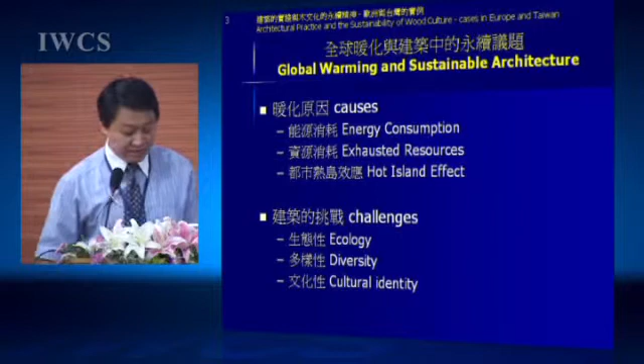A lot of presenters have said that of all the ethnic groups in the world, they all have wood culture. In the morning, we heard the presentation from Japan, and also the culture in China—they also have the culture of wood and wood buildings. Now they have lost it; the wood culture has disappeared gradually. That's the problem.

If you have the chance to travel to Europe, there are a lot of ancient wood buildings remaining there, as you can see in the photos on the left. This is a building combining wood and concrete, about 4 to 5 stories, in the city or countryside, especially in western and central Europe. There are a lot of old villages consisting only of wood structures. The whole village has been maintained and protected, so we can see there's a strong tradition in terms of wood culture in Europe. Let's look at the photo on the right.

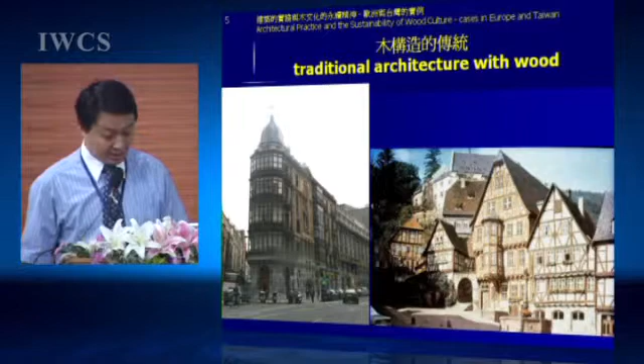This photo is of the Alps Mountains in Switzerland. It's a typical multi-level farmer's house, only 200 years old. Why I say it's young is because if you have the chance to go to Europe, it's very easy to find yourself living in a building of 200 or 300 years. Why were they using wood to build the structure? First, materials were around, and second, wood is very important—it's very good at insulating heat, and the place is very cold, so wood is very good to keep warm.

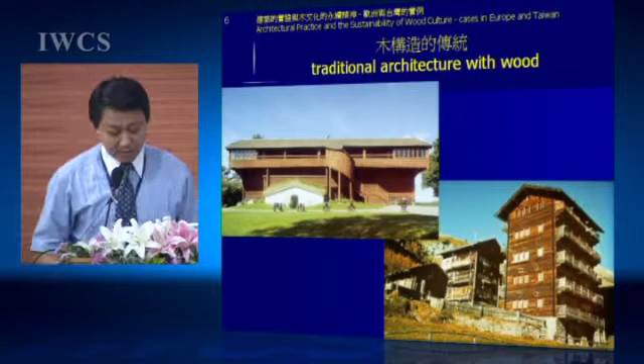The next project on the left is in Sweden. It looks like a very modern structure, but our investigation shows it is a building from the 15th century, about 400 or 500 years ago. The builder is unclear—it's only a village cottage. It also uses a lot of wood, a very high percentage. North Europe is a place with abundant forest resources. This is a church left from the 16th century.

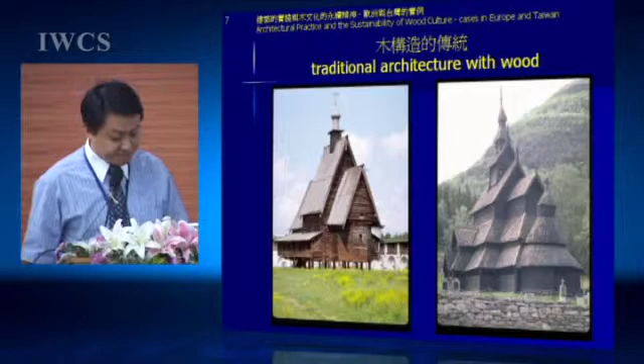UNESCO has also awarded protection grants to these churches. These are very old buildings.

From the perspective of modern wood structures in Europe, we can draw conclusions on the following points. First is the large size. Because of the development of modern technology, we are able to build large size buildings with large spans using wood.

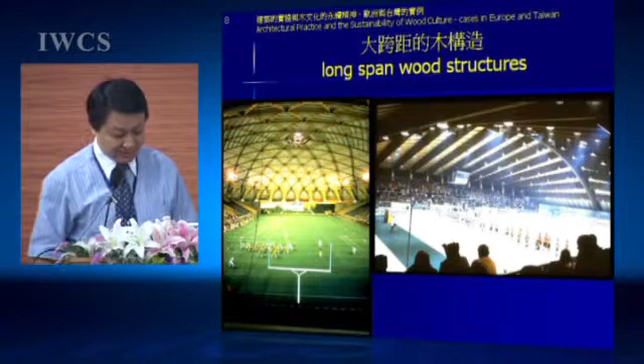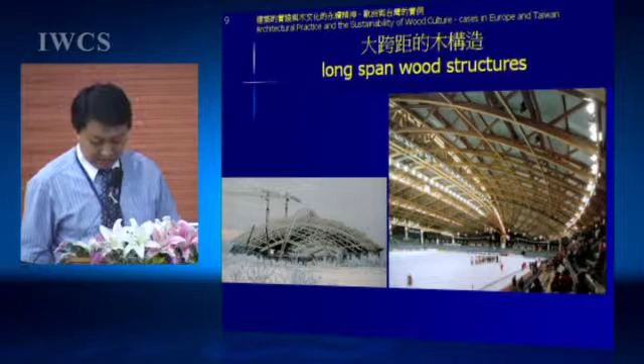This is an indoor sports venue in Germany. Let's look at the photo on the left. It's not from Europe, it's from the United States. It was built about 20 years ago. It's a very famous building. That's the long span wood structure used in the Olympics. There are a lot of Olympic stadiums built using wood.

We can see that with the development of technology, engineers and architects can use modern technology and modern methods to build modern architecture. That's a very big breakthrough in recent times.

Another thing is high capacity structures using laminated wood, especially for very big spans. Let's look at the left photo. This is in the southwest part of Switzerland. In winter there's very huge rainfall and snowfall in Switzerland.

The left photo is from France. In the center of France is an indoor swimming pool.

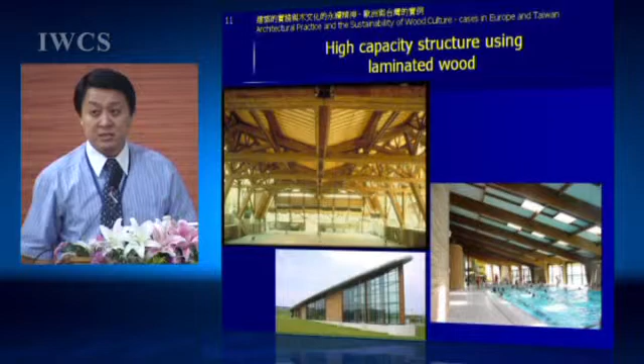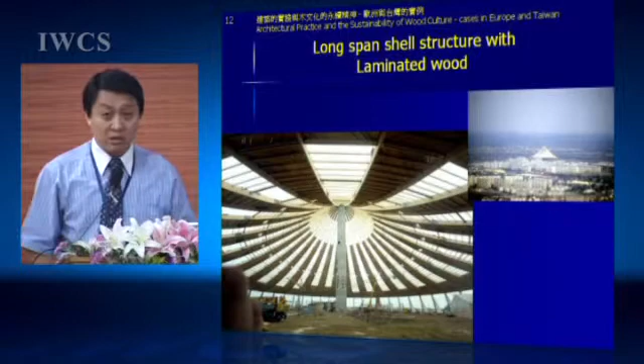In Europe, a lot of wood structure has been used to replace concrete because it is more humane, more comfortable for people. This is a very famous structure from the 1980s in Vienna. It's a long span shell structure with a span of over 100 meters.

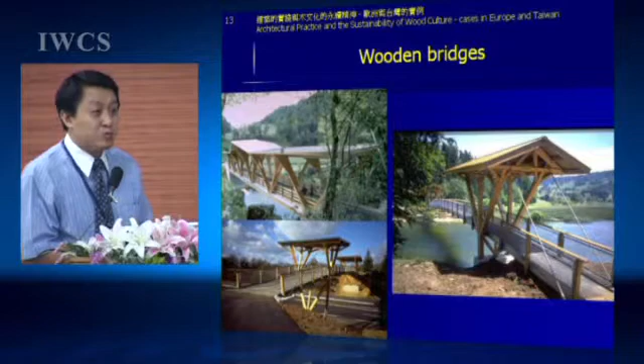These structures have one similarity, which can be seen in a lot of European bridges: they need to have a roof over the bridge. That is one similarity of nearly all wooden bridges in Europe. They want to have a roof because they want to protect the wood bridge underneath; otherwise the durability of the wood bridge will be damaged. So architects and designers believe that if there's a roof, the lifespan of the wood bridge will be prolonged.

This is a long span structure using wood trusses, with a triangle shape in the right front upright. People doing sports there can have a very comfortable feeling. Look at the left one.

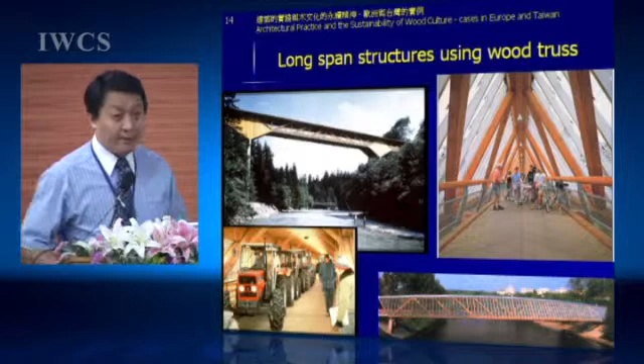This is a very long span wooden bridge, built using plywood. When the bridge started to be used, they had farmers drive their agricultural vehicles along it to give people more confidence in the bridge.

In terms of engineering, about 15 years ago in Lausanne, Switzerland, we did a lot of work on hybrid systems. The first system is the combination of wood and concrete. This concept is very simple.

In reinforced concrete structures, at the bottom they use a lot of steel. Like the professor said, to make steel we need to use a lot of energy. So we replace the steel with wood.

We just put in the nails to fix the wood onto the concrete. Let's look at this profile. If we replace the iron with wood, we can reduce a lot of carbon dioxide emissions.

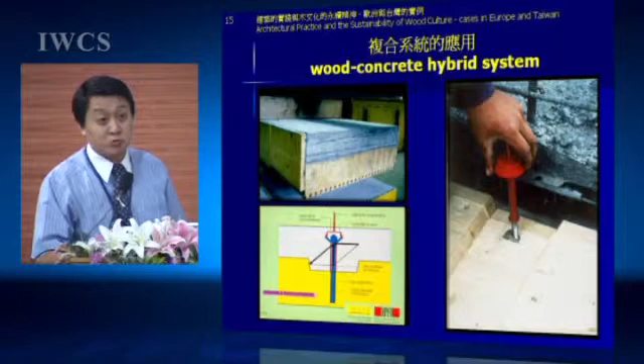And if we use this technology, 40 to 50% of the weight can be saved. That's a very special combined material.

The same technology has been applied in many other fields. We use the log because the log is very good - we don't need to process it much, so a lot of energy can be saved. The log can also be very useful to support heavy weight.

There's another hybrid system, look at the picture - it's 3 to 4 tiers of buildings. In Europe there is a lot of work using this technology, maybe 20 buildings using this technology.

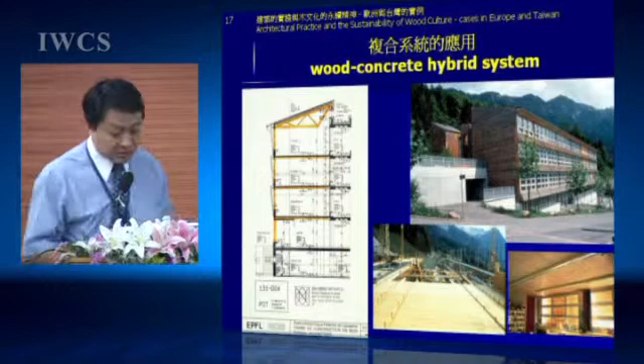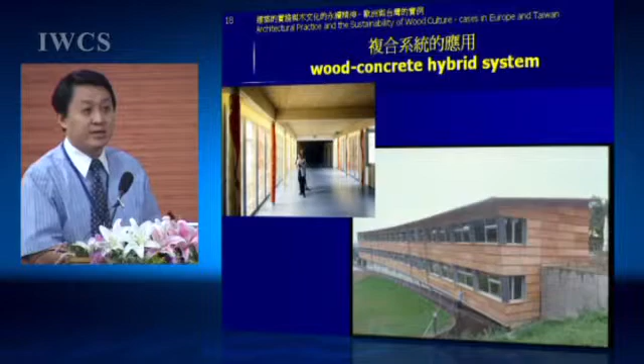This is another school building. Now in Europe there's a trend saying that in schools and hospitals, wood structure is very popular, and the government also gives subsidies for school and hospital buildings. If you want to build a wood structure, that means it's very good for human health and the environment, and the government will subsidize this practice.

This is another combined structure. This may be the largest scale, 9 buildings in Switzerland.

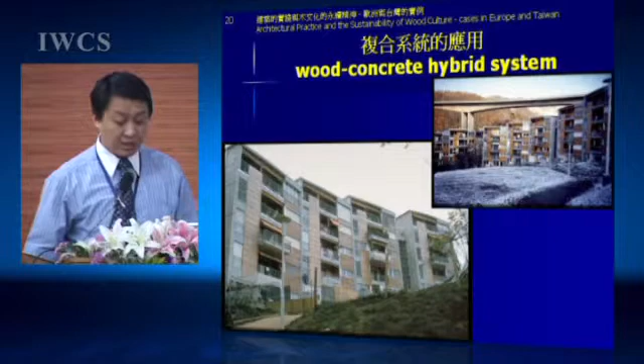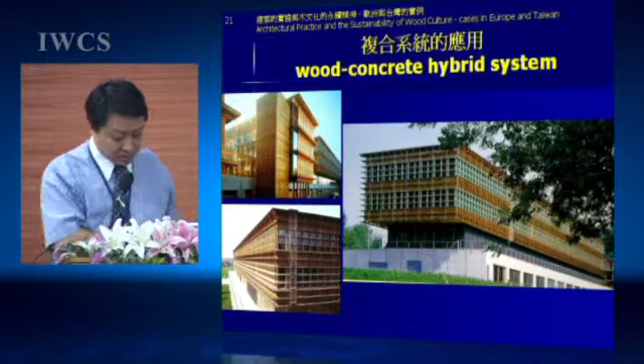It's a 5-story building, all made of wood. This is a school building. You can see that at the basis, where there is a high demand on firefighting, we will use the traditional RC. The second, third, and fourth floors, if they are classrooms or student entertainment spaces or laboratories, we use only wood.

Okay, another hybrid system. We use wood and glass and combine them together. In building, glass is only something for decoration, but in modern steel structure, they develop the glass and use glass as a kind of building material. And then we combine the glass with the wood.

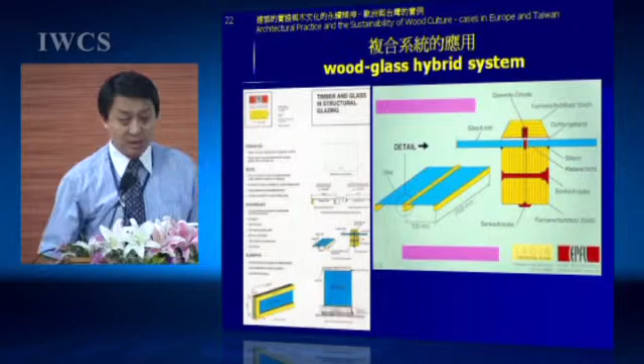Here we use a wood frame and have a plywood, and then as a result we have a wood glass beam. After the test, we see that it is very powerful and stressful. It is very easy for extension.

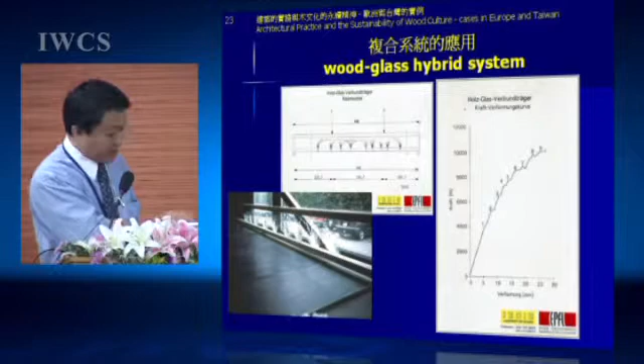That's a very good technology, a very new know-how, and we have used this technology to build a lot of new products. So you can see from this building, the glass is not for decoration. It's only a part of the structure as a beam. There's a lot of such cases in Europe.

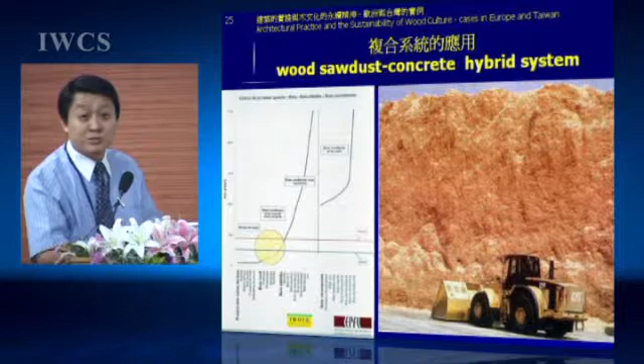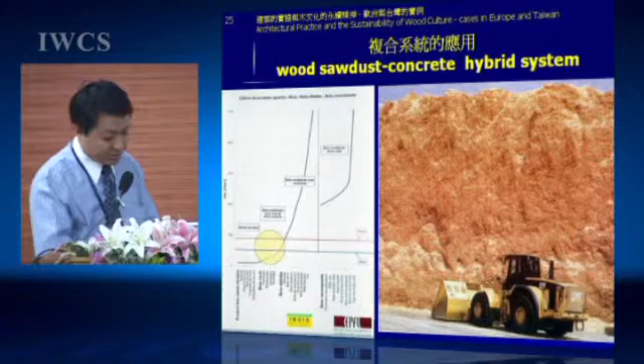Okay, the third hybrid is the wood sawdust. The more you process the wood, the more expensive the wood will be, because the more you process the wood, the lower its competitiveness against other materials. For example, if we can use wood sawdust as the raw material, we can use the sawdust as the material of concrete. You know, the sand and the stone are not renewable.

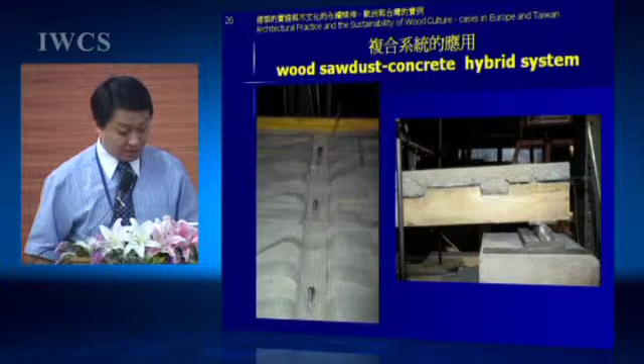And lately in Taiwan, there's a supply demand gap in sand and stone. Usually we import from mainland China, but now China has somehow banned export. So we lack the sand and the stones. If we use the sawdust to replace the sand and stone to make concrete, that will be very good, and the price will be lowered.

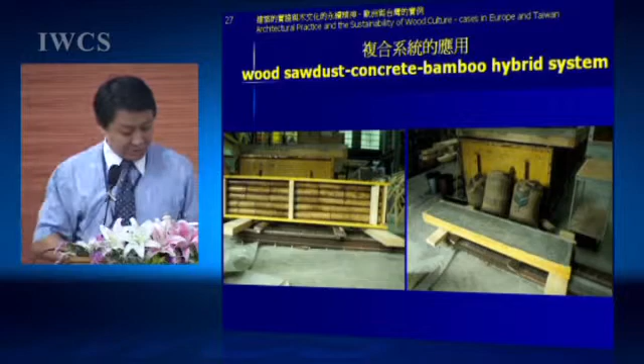We also have the wood sawdust-concrete-bamboo hybrid system. In Europe, we have something very special - you know, in Europe we do not have bamboo, but in Taiwan and in southwest mainland China, there are very big resources of bamboo. So that is a structure of bamboo and wood.

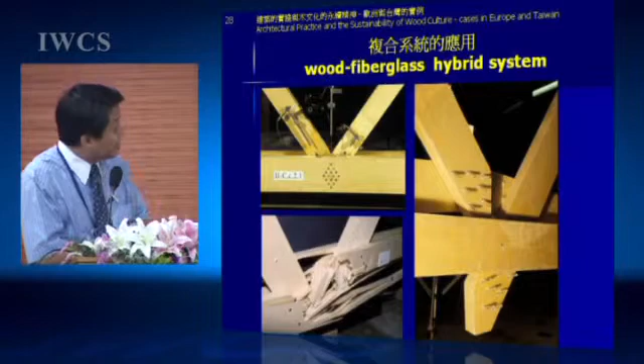The last one is the fiberglass and the wood, the combination of wood and fiberglass. You can see that this wall usually... the fiber of the wood is the most complicated problem. If we can have the wood and the fiberglass combined together, we can have very strong strength and a very powerful structure, and then they will be more safe to use this product.

This is a case of wood fiberglass. We have been using this technology to build a lot of bridges in Switzerland. We have hidden the fiberglass in it because they are not very good at withstanding sunshine. So this product is very good.

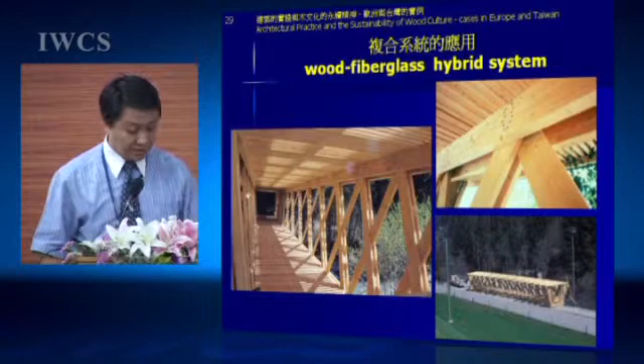That's the fourth use. The fifth use is still under progress. I don't know whether there's the same study in mainland China. It is the ultrasonic wood welding technology. We do not use polywood here - we will have the friction of the wood, what we call welding wood.

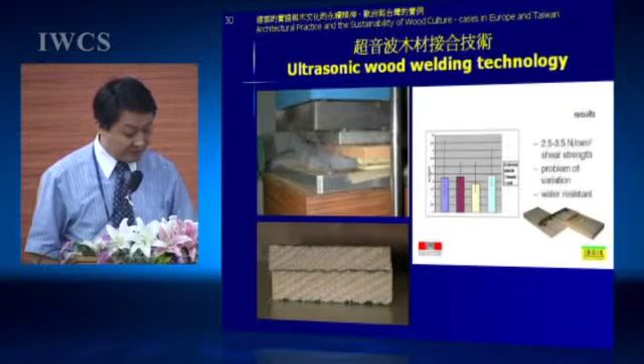You know, we can weld irons. Now we are trying to weld wood. We take the two pieces of wood, get friction between them, and then have the fibers of the two woods get together. Now our testing shows that after the friction, maybe 90% bonding will be attained without any polywood. That's a very good direction.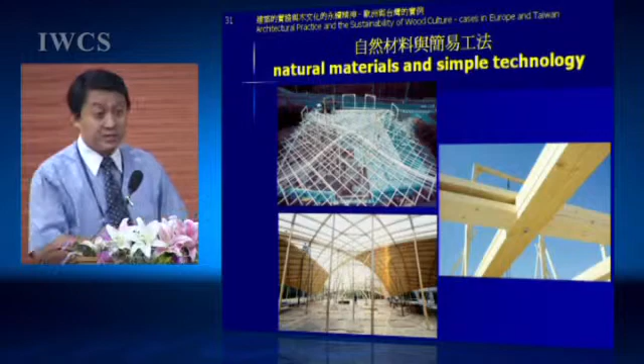Okay, about Europe, I want to talk some about natural materials and simple technology. Now, we are not talking about plywood beams because that needs big investment and input and is much more expensive. For example, this workshop...

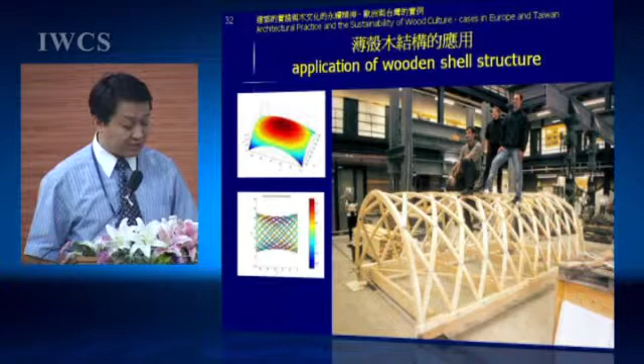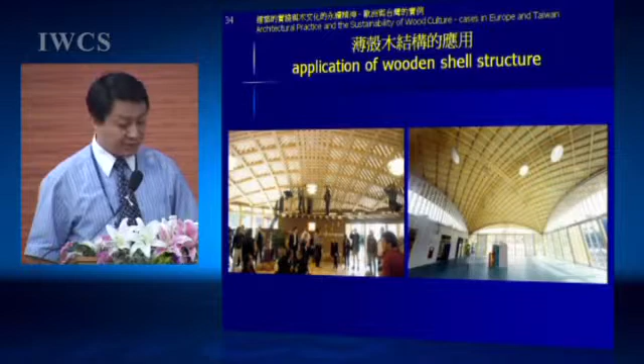We have done some work - we have done a lot of computer simulation, very good properties proved. So it's at a width of 20 to 25 meters, or as wide as 40, and the same craftsmanship is used. The processing technology is used, and only board is used.

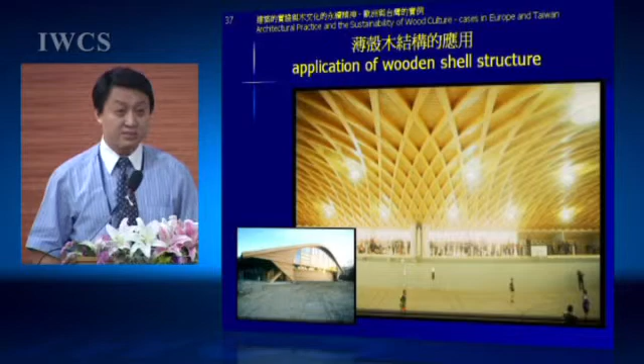This is another example in France, and very simple processing technology is used. This has the largest width, over 80 meters. And the cost per unit is quite limited, it's quite low, and log is widely used for a long time, and the cost of log is much lower than some of the processed materials.

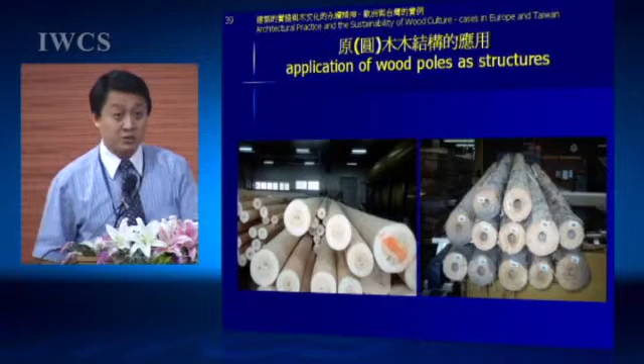Our suggestion is that we directly use log, but there are two questions. One is the drying technique, and the other is that after drying, there might be some damage to the original property of the wood of the log. Currently, generally speaking, the current processing technology is to do drilling at the core, single core drilling.

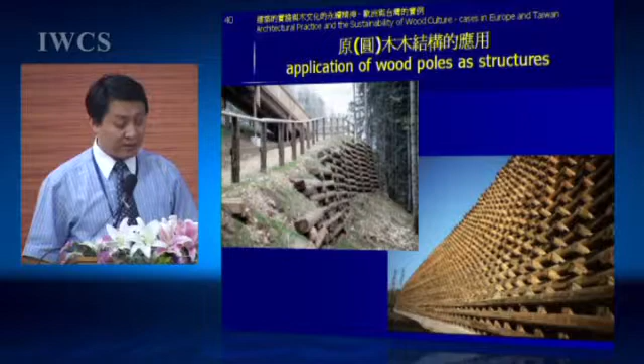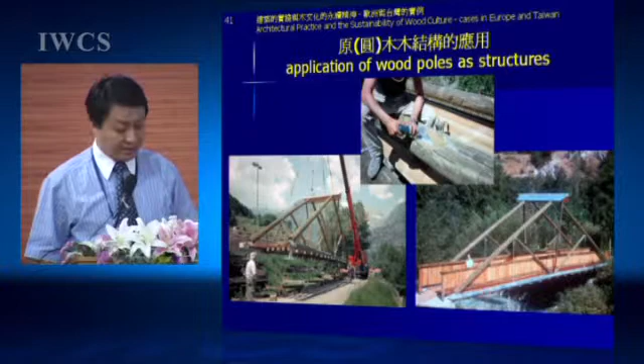Professor Wang has pointed out that in Europe there are practices where log is directly used as the final material for the structure. This is a picture taken in the rural areas of Switzerland, where log is directly made into a bridge.

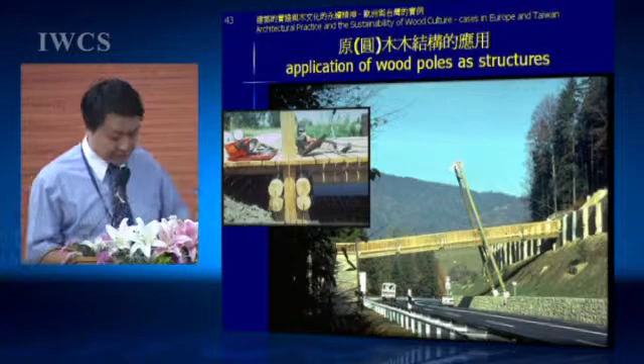Local government can't afford the bill for this highway which links Switzerland to the border of France - a wooden bridge, because the local government ran out of money. The story goes that the designer asked the local government, 'What is your budget?' And the answer was, 'We don't have any budget, we only have wood.' That's where this wooden bridge came from, born 10 years ago.

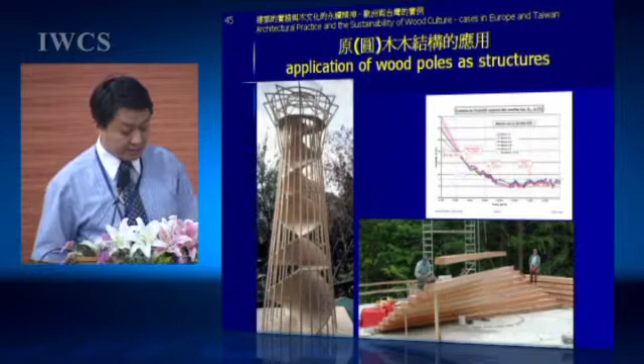I'll be briefer. These are recent works in the French-speaking area of Switzerland, over 40 meters high. Log and board are used, and this is a watching tower - a completely new project.

This work was exhibited 10 years ago in Switzerland, and the requirement was that in the future every component can be taken apart, and the recovery rate must be calculated. After the exhibition was over, 90% of the material used was sold to Rome. So economically, it's very ideal. Actually, the processing technology for log is rather mature.

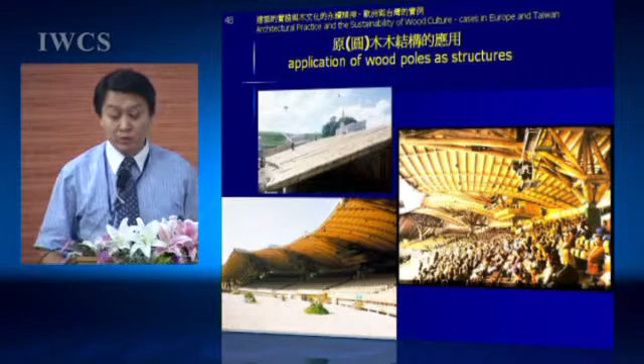Now this is also a public area being built with log in Deutschland. The standing structure and the ceiling structure are made of log.

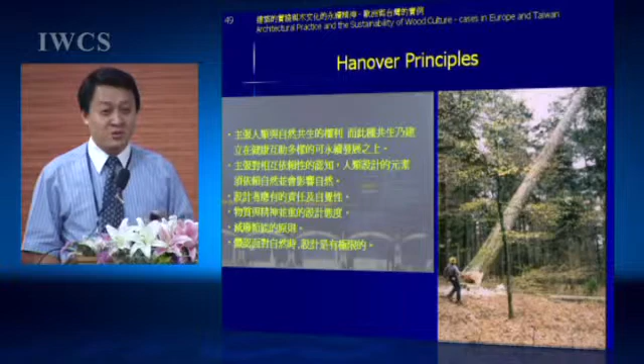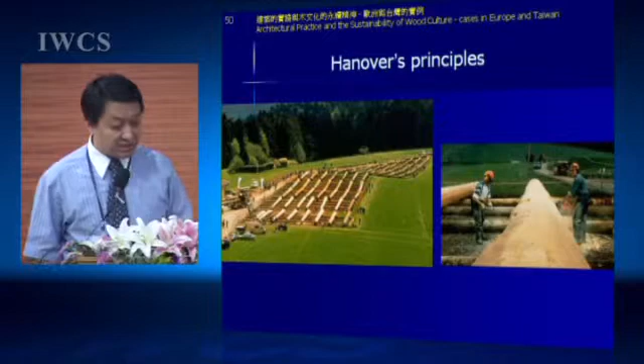In 2000, there was a very big World Expo in Hanover, and the designers of the expo station put forward several principles. If you read through these principles, you find no single word mentioning that wood must be used, but actually 90% of the structure was using wood, which has catered to today's bio requirements and was really a pioneering structure.

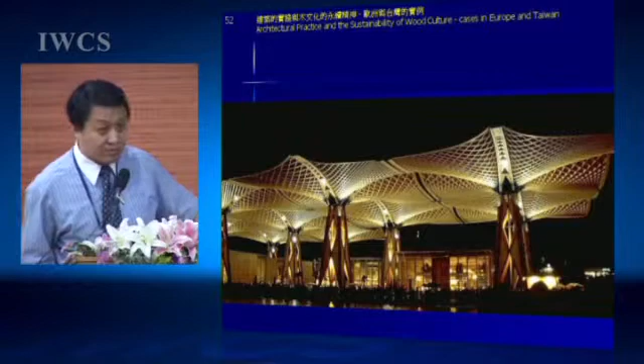And this is a well-known big umbrella structure in Hanover. This is the central part.

I have spent a lot of time doing case studies, and please allow me to do a little advertisement.

This is a master program at the University of Vienna. This program has started, however the enrollment rate is very low this year because whenever students think that only German is used as the teaching language, many students are reluctant to come. But this is a very good course.

It talks about urban wood structure, and anyone majoring in wood structural civil engineering can participate. It's a multidisciplinary program, and it is also a multinational program. It will have rotatory courses in 3 countries.

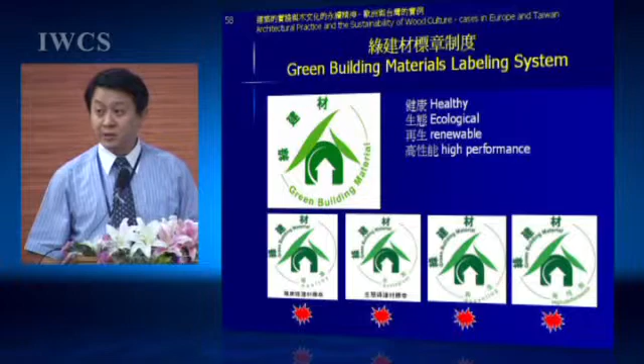About 2 years ago, we started a study on green building material with 4 directions: healthy, ecological, renewable, and high performance. In these requirements, if it's an imported product, we need FSC and PEFC certification.

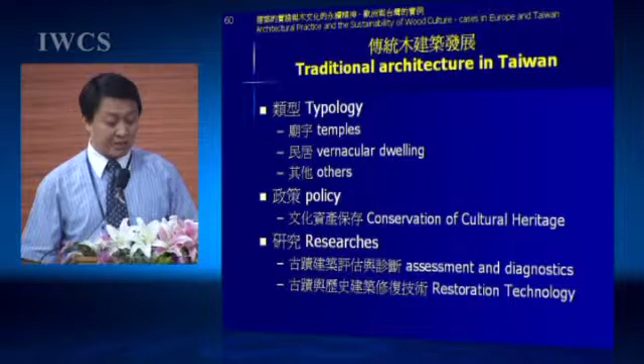About the future trend, I think first we have several classes like temple and residential areas where wood is used. For example, this is a building that was built in the Qing dynasty during Qianlong Emperor's reign.

This structure is being renovated now, and the major problem for the maintenance and renovation of ancient buildings is the inadequacy of high-quality wood. For example, the material used in that old ancient building cannot be found today.

And this is a Daoism structure in the middle part of Taiwan, about 220 years old.

Another headache is that we don't have enough investment in material science.

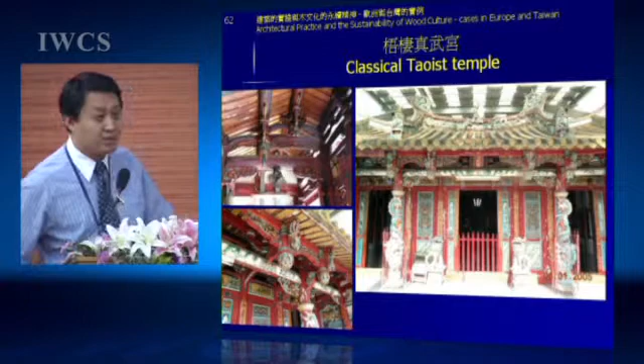For example, in China, the most difficult temples to renovate and maintain are those made of wood, because there are so many carvings, paintings, and handwriting on the wood. So it's not a single problem of making the wood strong enough to support the structure - more importantly, you must protect those precious carvings and markings left on the wood.

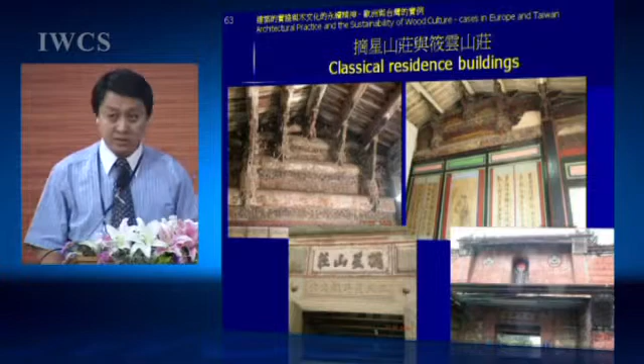On the left, it is in the middle, it is a village. And the owner of this village or this structure is well known for his efforts in cracking down on the Taiping Tianguo gangsters.

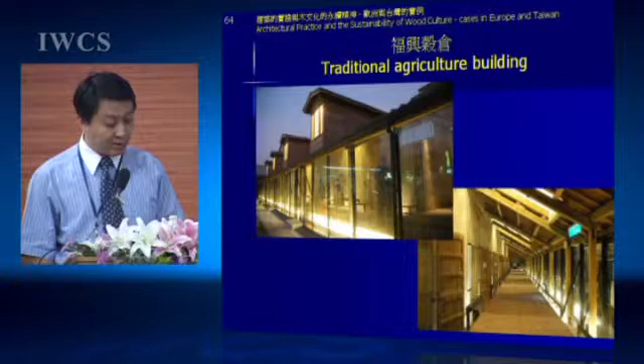This is also found in Zhanghua, mid part of Taiwan, an ancient city. We have renovated the area.

And this is in the Donggang port of Taiwan, from when the Japanese were occupying the island. It's about 30 meters wide, but we cannot retrieve the exact time when this was built.

Actually, the designer later went to Japan to ask when this structure was built. However, the Japanese answer was that it was built during the war era, so it was military confidential. So nobody knows when this area was first built. Now it is not opened to the public, but we are preparing to do that.

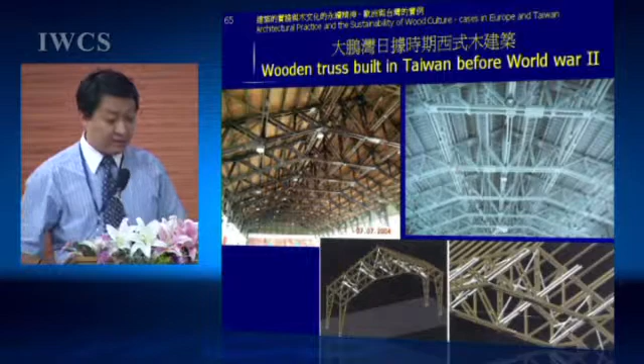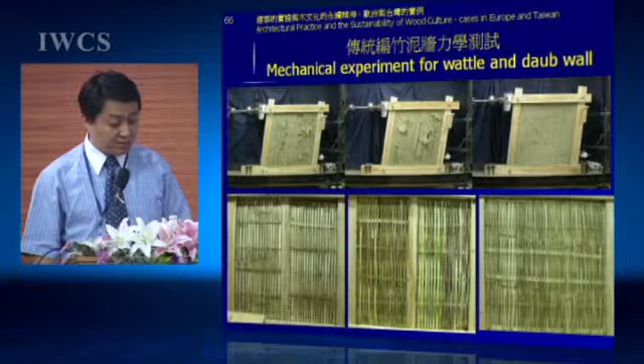We have been doing some study on the possible renovation of these ancient buildings. We have also done some experiments, conventional methods to do these experiments. For the current wood structure, it is fair to say that Taiwan is only fledgling in building its wood structure.

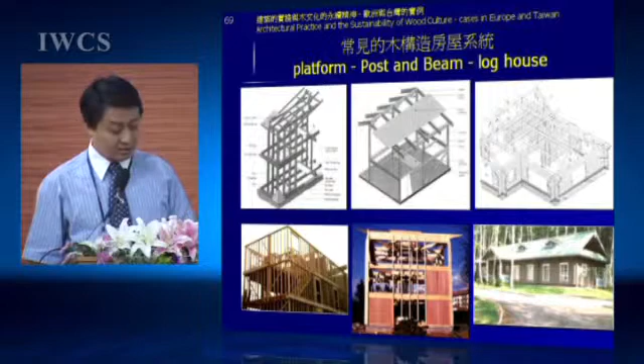The log system is one of the three most popular types of structures, most widely used in small residential houses. In 1999, after the September 21st earthquake, many houses collapsed. In some remote, mountainous areas struck by the earthquake, people began to use biomaterials.

This is a case where they built an elementary school using wood. This is another, using logs to build a bank. I think Mr. Wang is more familiar with this project.

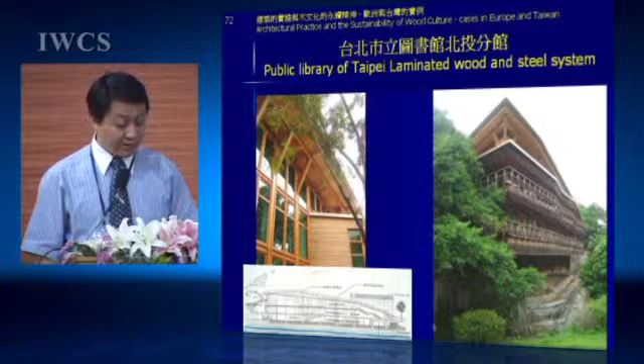This is Taipei City Library, a building built with both wood and steel. This is in Nantou—a museum of forest industry built with a laminated wood and steel system.

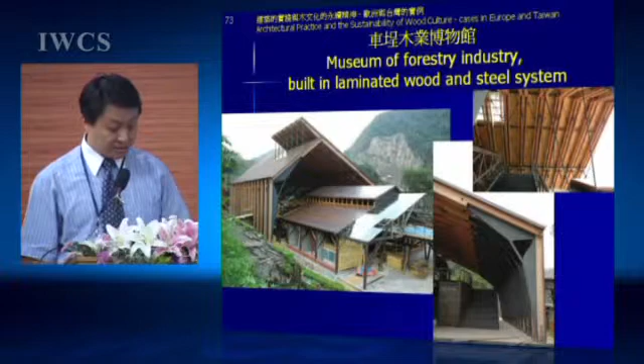We built a new building to protect the old structures under it. The design was a cooperation between Taiwan and Japan.

In the end, I want to talk about how we promote wood structure in Taiwan, how to enhance people's awareness. I have the following ideas: first, we want to have a development center; second, we want to have this promoted in schools.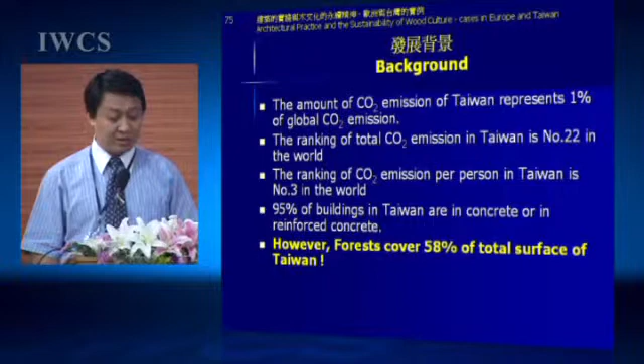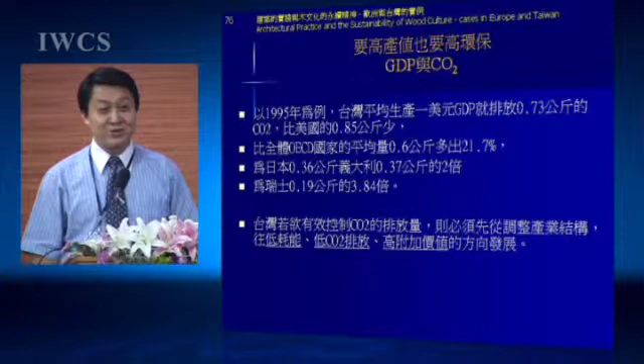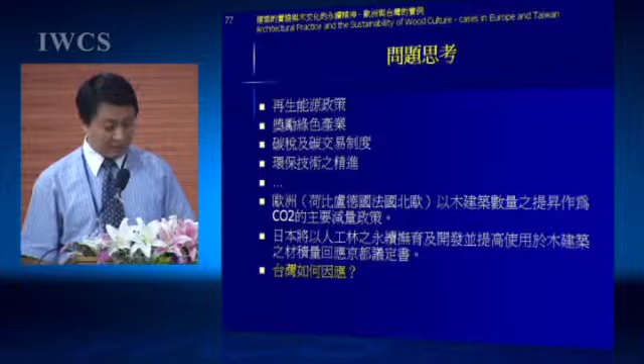Taiwan's carbon dioxide emission ranks 22nd in the world—1% of global carbon dioxide is from Taiwan, but Taiwan's forest coverage is 58%. With such a high rate, people still don't feel it. So first, the government should talk about it and make policies, like other countries discussing carbon storage trade, and whether Taiwan should learn from Europe and Japan to expand sustainable forests to increase carbon storage.

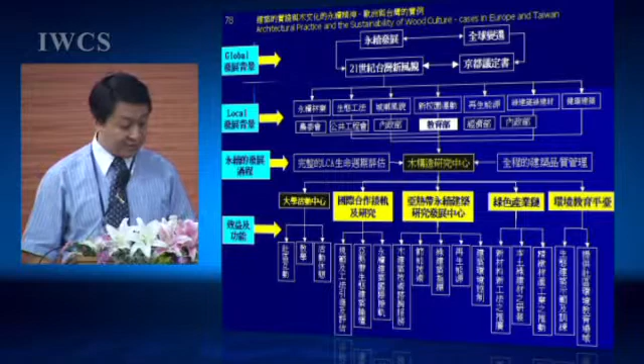That's a very good idea. So we established a wood structure research center in Kaohsiung University to bring together different ideas for a comprehensive consideration of sustainable forests, renewable architecture, and other technology.

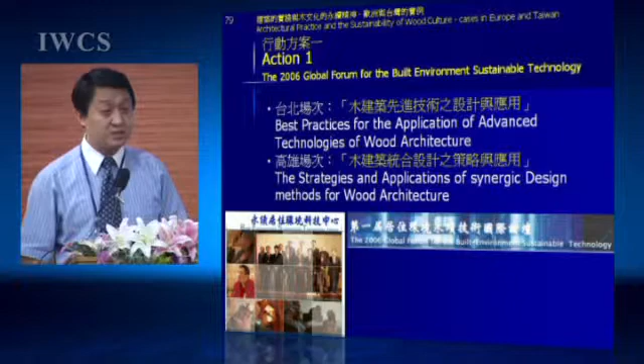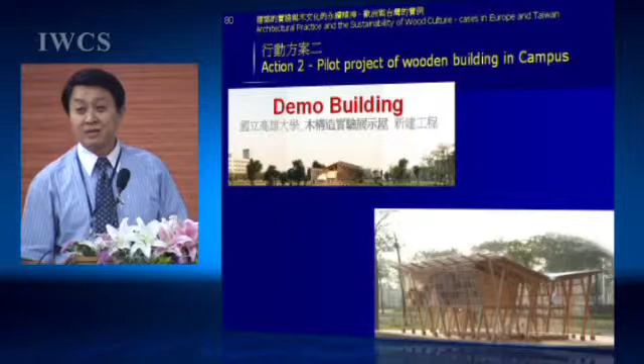That's our initial idea. Last year we held an international forum to discuss wood structure, advanced technology, and design applications—that's the first action. Second action: we want to build a wooden building on campus.

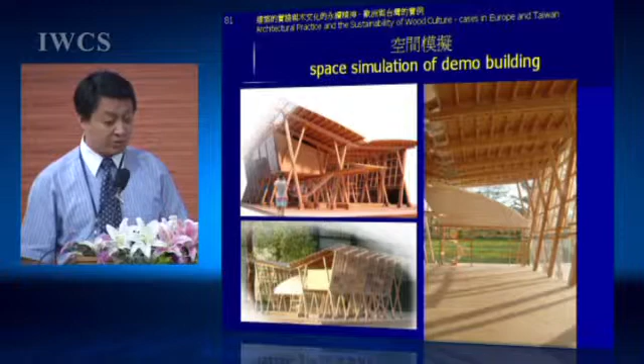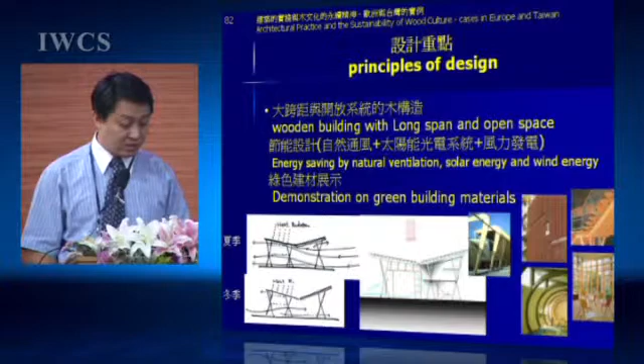This will demonstrate the use of advanced technology in building. This is the space simulation, and we will start actual construction next month. It's a wood building with long spans, using energy-saving methods.

Our project goals are to introduce more engineered wood into public construction, to demonstrate the feasibility of developing large-span wood structures, and to integrate wood. Our last goal is to build an exhibition.

That's our big idea—to hold an exhibition for wood culture, to help people understand wood structure, to have correct ideas about wood culture. We have a lot of ideas and resources to display in this exhibition.

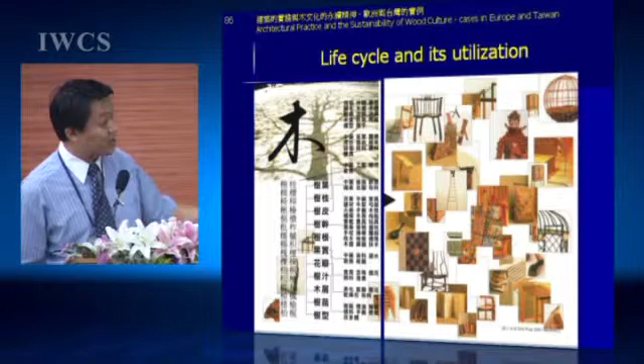You see, it's a tree with branches, showing that wood can be used to make many things, as small as toys and as big as buildings. I hope we can use the idea of complete use of wood to show the life cycle.

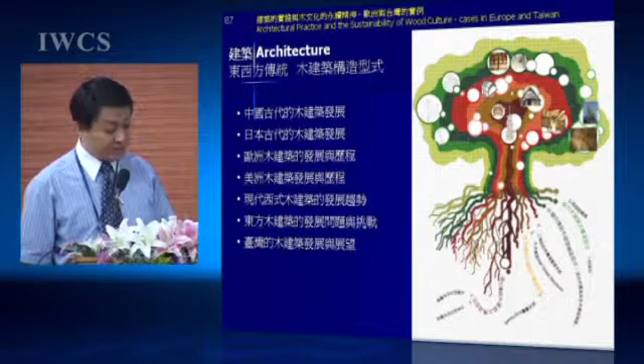We also introduce traditional wood structures like those in China and Western countries. Now we also reflect upon the buildings in old Taiwan.

For example, this is our indigenous structure from the 1960s. Then the structure developed as the Han people moved to the island, and the hut evolved into skyscrapers.

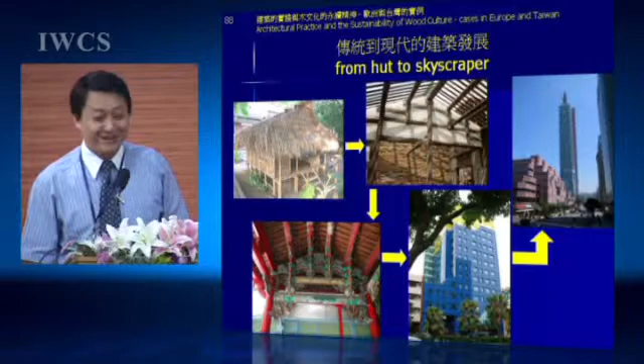This building is 508 meters tall. It's now the highest building in the world, but by the end of this year it will become the third.

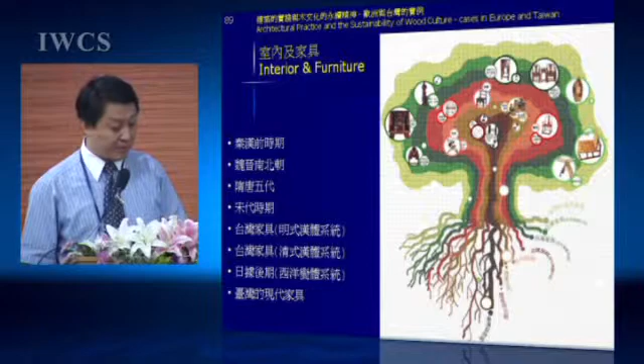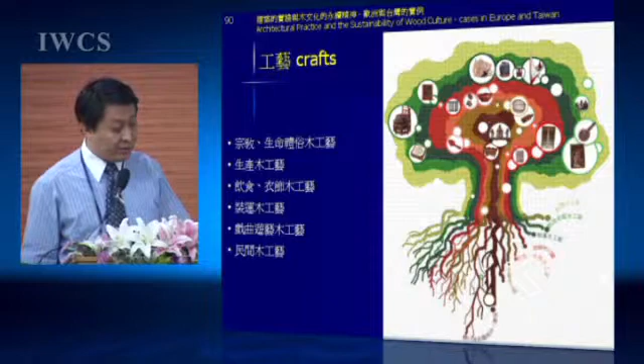This is interior and furniture development—I think there are a lot of experts here who will talk about furniture, so I won't go into detail. Then there is craft; we understand that wood culture has existed for a long time.

In conclusion, the application of wood culture is consistent with current efforts to protect the environment. Wood building carries on tradition and conforms to our current attitude toward natural resources. Wood structure protection is a responsible action for forest products. That's the end of my presentation. Thank you very much.